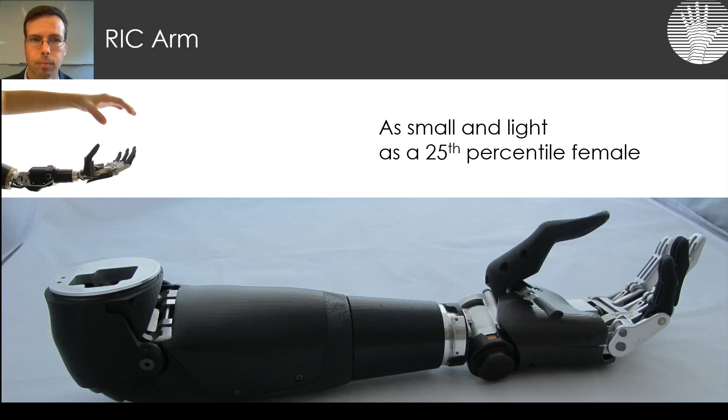Really, I think there were three lessons that we learned throughout this process. The first was that all prosthesis motion is dynamic acceleration bursts. It's not a constant speed. You're stopped, you make a movement, you're stopped again. That means there's dynamics involved. And so we found that conventional motor metrics were really not indicative of the performance of the motor designs that we needed, and I'll tell you a bit about that today.

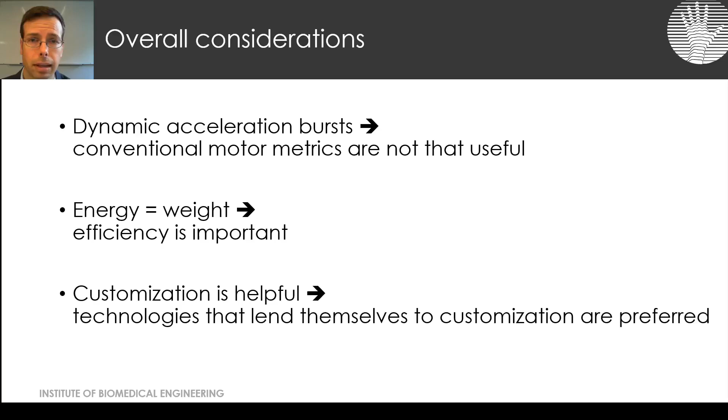We also found from our DARPA work that energy equals weight. So you can't just ignore the efficiency if the battery has to live within the weight confines of the prosthesis, and therefore efficiency of the mechanism is very important. And finally, we found that customization is really helpful. And so we found ourselves going towards technologies that were developed by other industries, but that were able to be customized so that we could tweak them for our specific applications. And I'll tell you about a couple of the technologies in particular that we customized for our prosthesis.

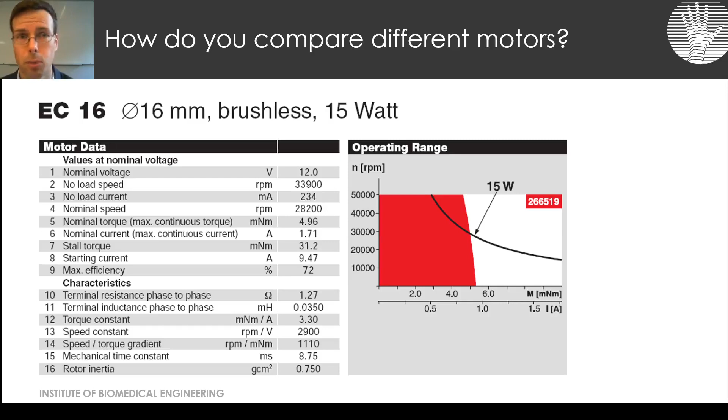Okay, so the first thing I want to talk to you about is motor metrics. So when you're trying to size a motor for your particular application, you can look at a motor manufacturer spec sheet and they give you a variety of parameters. And which one do you use when you're choosing a motor? Oh, that's a good motor. Oh, that motor's not so good. And specifically, if you're designing for robotics, how do you choose a motor?

One of the interesting things about robotics, which is a relatively niche field compared with all of the other motors that are used in the world, is that they typically have a limited range of motion, and they typically have high bursts of speed. And if you have a high burst of speed, that means you're going to have high acceleration. And high acceleration, given the inertia of the device, means that you're going to have high torques at high speeds. And the combination of high torque and high speed is that one spot you don't want to be in a motor design. And so it becomes the weakest link in the chain, so to speak, or the Achilles heel.

We can look at this by looking at the torque versus speed of a given motor. So a given motor can produce a maximum speed and a maximum torque. And relatively speaking, there's a linear trade-off between the two, which is limited by the resistance of the motor. How much current you can push through the windings limits the available voltage, and the voltage in turn determines the speed at which the motor can go at. So there's a linear relationship between the two, and we can accordingly think of a motor as having an envelope of speed-torque combinations that it can do.

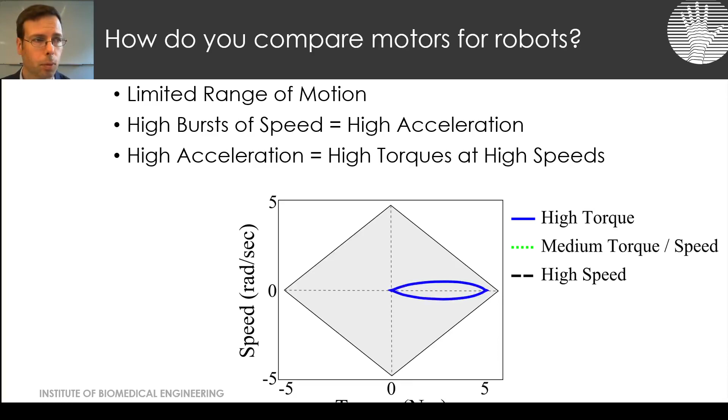We can then plot a profile of a given task with given dynamics, given inertia, given kinematics. So, for example, we can say, what if you're carrying a very heavy object, but you're moving relatively slowly from one position to another position? Well, in that case, your torque speed profile will look something like this blue curve. And you can see we're relatively close to the envelope of the motor, but we're okay.

We could say, well, what if I'm carrying less weight but moving a bit faster? We can see that's not going to be any issue for this particular motor. And finally, what if I'm moving really fast? You can see here that we're completely fine in terms of speed—we're well below our maximum speed.

But ironically, we're coming pretty close to that diagonal line of speed and torque. So it's the high speed task that may limit us, and it's not just because of the speed—it's because of the torque that's required due to the inertia and the acceleration.

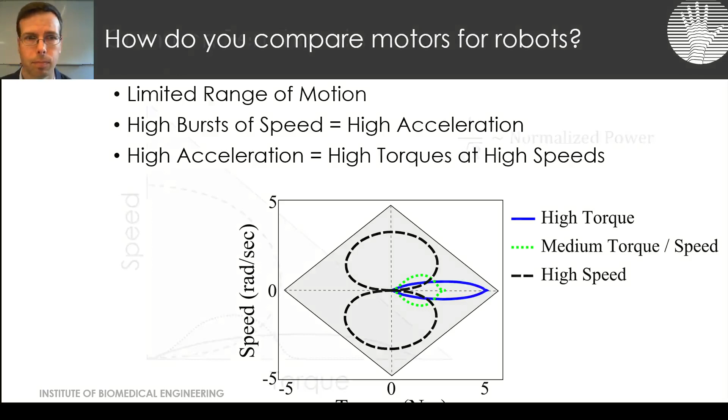Let's take a closer look at this plot, and let's talk about it in terms of some of the metrics available in commercial spec sheets. Many of you will be familiar with the stall torque or the torque constant of the motor, which map to the maximum torque the motor can produce, or the torque a motor can produce for a given amount of current.

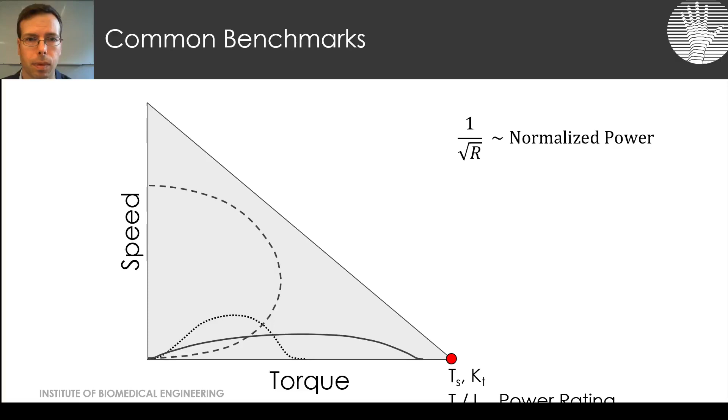We can also normalize that by the inertia of the motor and talk about the power rating. We can also look at the area—interestingly, the area of this envelope is equal to the maximum power. This is a rating commonly used by non-roboticist motor designers who want to know the power rating of this motor. It corresponds to the area, but we don't necessarily care about the area—it really depends on the profiles of the tasks we envision for these robots.

Now, a similar idea to the area is what's called the normalized power, and this is just 1 divided by the square root of the resistance.

So there's a motor constant. A motor constant is independent of the windings of the motor—motors can be wound with different windings. We see that the motor constant kind of blends together the stall torque with the normalized power concept. There's the maximum acceleration, and it turns out that this is equal to the motor constant normalized by the inertia of the motor.

And then finally, the one that we have found to be most useful is called the speed ratio. This is equal to something similar to the maximum acceleration, but the motor constant is squared. I'll talk to you a little bit more about that.

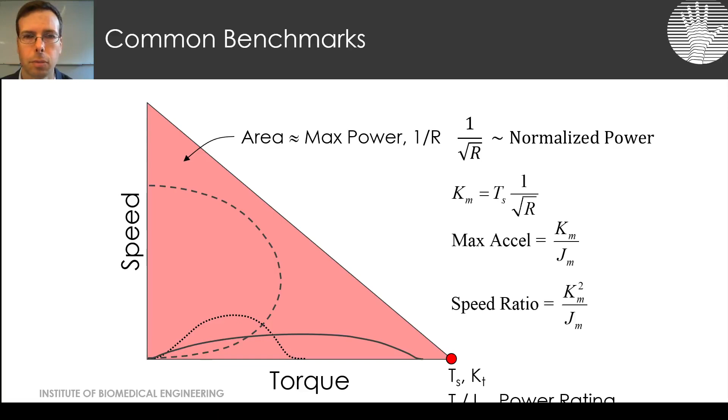So what we found is that if you set your motor envelope given a particular motor, and if you set your task given the profile you wish to achieve, you can mathematically separate the motor parameters from the task parameters. We did this in a paper we published in IROS, so you can check out the paper for the derivation of that.

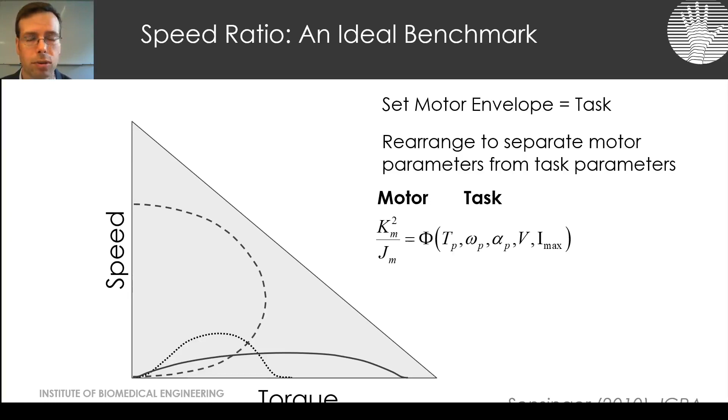So essentially you're saying, okay, I can get this speed constant from the tech sheet, and then I can calculate the value using this equation, which is available in our paper, as a function of what's the torque, what's the speed, what's the acceleration, what's the voltage, and what's the current.

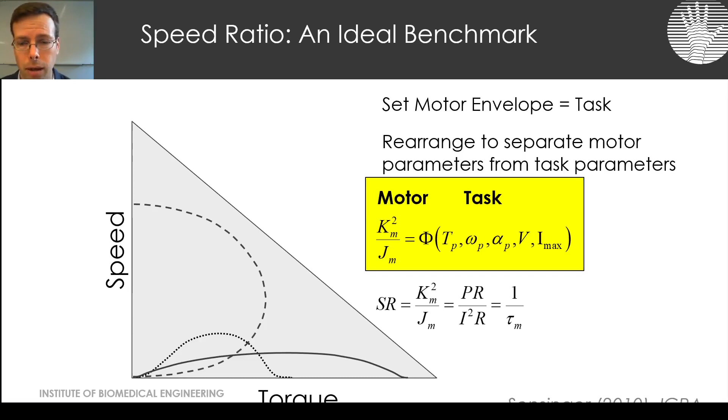Now, most tech sheets actually don't report the speed ratio, but they do report the mechanical time constant, 1 over tau m. This information is readily available on almost every tech sheet, so you can use it to predict whether a given motor is a good or bad motor for your specific design, regardless of the task. So we have a couple of assumptions here.

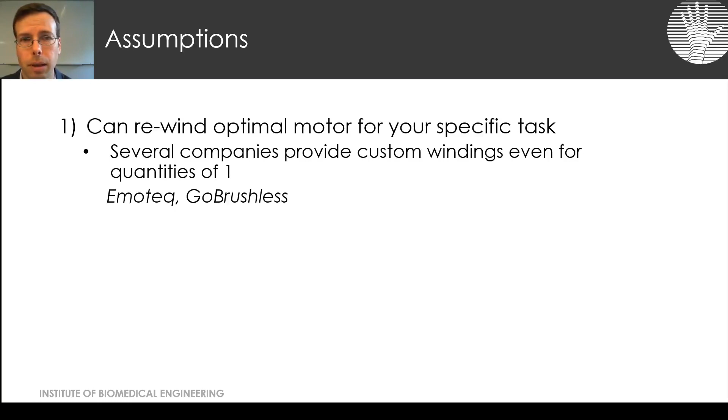One is that you can wind a given motor for your task. So when we're designing motors, we're looking at the general architecture rather than the specific winding—we're assuming that we can wind it. There are several companies that will do custom windings for you; two that we've used are Emoteq and GoBrushless.

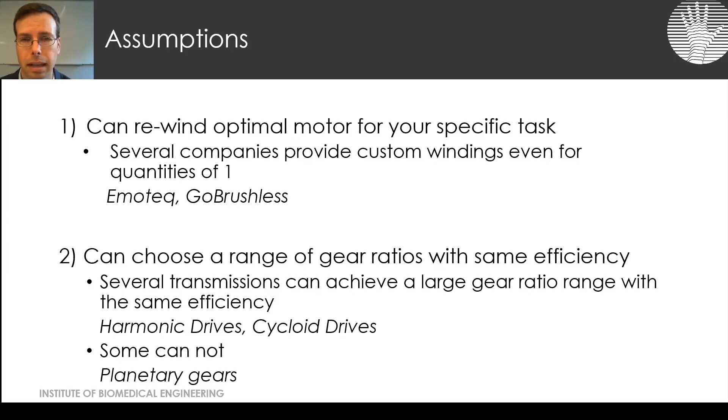We also assume that you can choose a range of gear ratios, and I'll talk to you about that in just a minute. We've used harmonic drives and cycloid drives in the past. Some gear transmissions cannot achieve a large range of gear ratios while maintaining a constant efficiency—planetary gears are a good example of that.

Okay, so I just want to leave you on this point with a simulation study that we did where we looked at a range of tasks. We looked at the motor envelopes and asked, was the particular motor able to achieve the tasks that we wanted?

And then we compared a variety of metrics. You can see that the rated power doesn't do that well. It can only predict about 60% of the success rate for real-world applications where motors do dynamic, ballistic tasks. And you can see that the speed ratio, while still not perfect, does a much better job of predicting whether a given motor is going to be suitable for a particular set of tasks.

Really, at the end of the day, you have to look at the motor envelope in order to see if a given motor design is going to work for you. But as a quick approximation, just sorting through all of the motors available, speed ratio does seem like the metric that's best for getting a quick guess on the power.

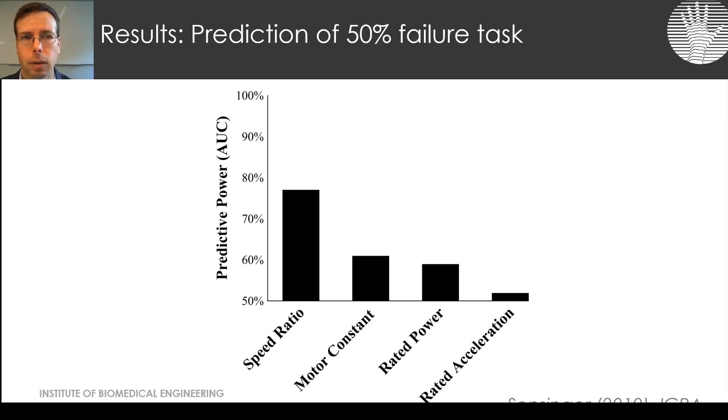Okay, let's transition to talking about, now that you know a general architecture for your motor, how can you tune, what should you be looking for in designing the motor?

So at least for prosthesis design, and I think for most robotics design, stronger is better. If we have a given output torque, a higher motor torque means that we can use a smaller gear ratio. And smaller gear ratios are really beneficial for most applications in robotics. If you have a smaller gear ratio, that means your gear is spinning slower, and that means it's quieter. So if you care about sound, you want a high torque motor.

Also, typically, a smaller gear ratio will be more efficient. So as long as you can maintain the efficiency of your motor design, you'll get an added benefit of efficiency in your motor. Typically, smaller gear ratios can be smaller, and they also take less weight. And at least for prosthesis design, transmissions are about 2 to 3 times the motor mass, so they're a significant part of this weight equation that we're always trying to minimize.

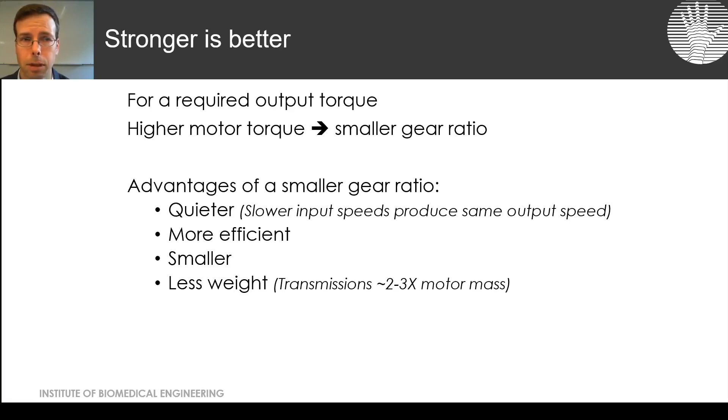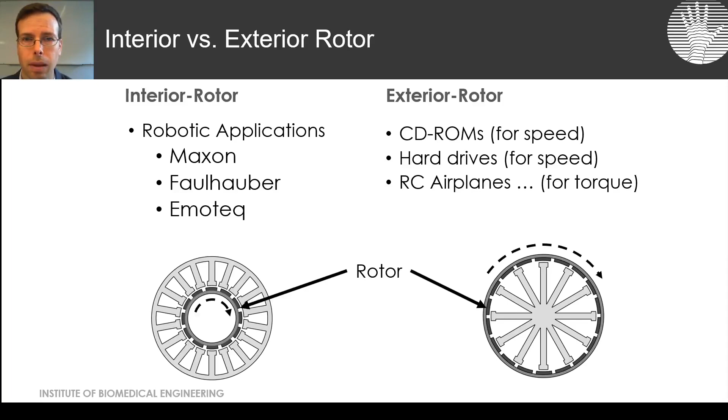We found that exterior rotor motors are really good for delivering high torque applications. Interior rotor motors are much more well known in robotic applications. Maxon, Faulhaber, and Emoteq have all conventionally done it, although Maxon's recently switched over to exterior rotor motors as well. Exterior rotor motors, ironically, are better known for CD-ROM drives and hard drives because they can spin at incredibly high speeds without the magnets ripping off due to centrifugal force. But recently they've been used for RC airplane and drone design, and they can develop pretty high torques in those applications.

So we've done a variety of studies. We've done simulation studies, we've done experimental studies, and we've consistently found that exterior rotor motors have more stall torque, better efficiency, and use less power than similarly sized interior rotor motors.

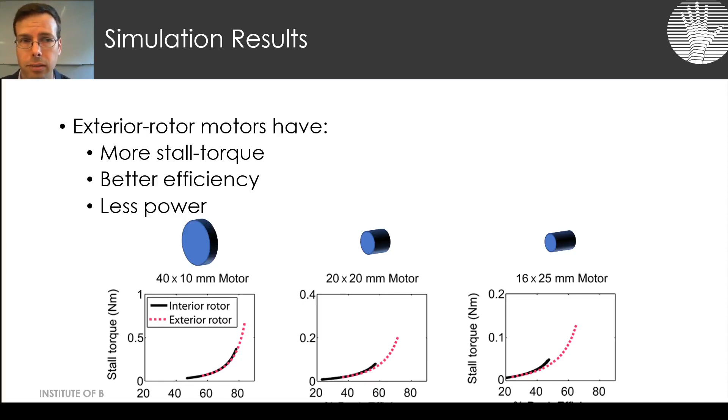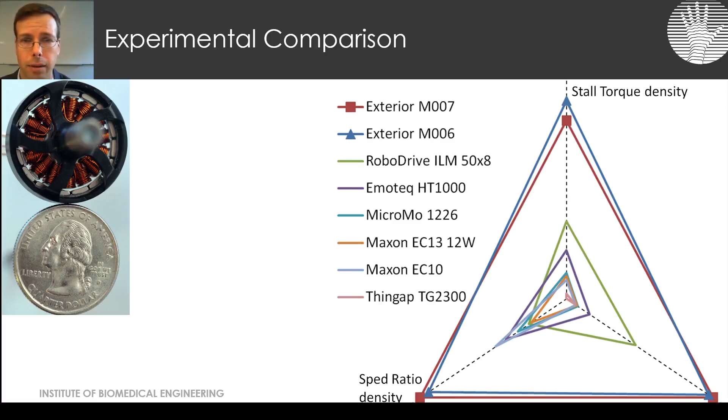We've done a variety of empirical studies. This is an example of a motor that we had custom wound for us. It's about the size of a United States quarter. And you can see whether you're looking at speed ratio density, which we think is the best, or motor constant density, or even stall torque density, the exterior rotor motors are consistently substantially better per weight than interior rotor motors, regardless of the company that's making them.

There are some concerns when I go to conferences, and when we have the discussion today, some of you may want to talk to me about some of these concerns. There are some common concerns that I get asked about switching over to exterior rotor motors.

How do you do heat sinking, for example? We found that we can heat sink from the back. Some people are concerned that the rotor itself is only supported on one side, but the existing hobbyist designs have really solved this problem. They've got a double bearing design, and that does a good job. You do have more inertia because the spinning part has a larger diameter, the exterior part. But we can get away with a plastic rotor shell using some tricks of the trade to keep the magnet flux working with very thin flux rings. And so we're really able to reduce the inertia of the rotor.

Some people say, well, historically they're used for high speeds, but that's only because of centrifugal force. And a lot of people say, well, they're not commercially available, but they're becoming more common. Maxon is now producing exterior rotor motors. And many hobbyist companies are willing to wind drone motors for you, although they'll often caution you that they don't think they're going to fly, which is fine. We're not using them to fly. Two companies in particular are Go Brushless and Castle Creations. There are many more that are available as well.

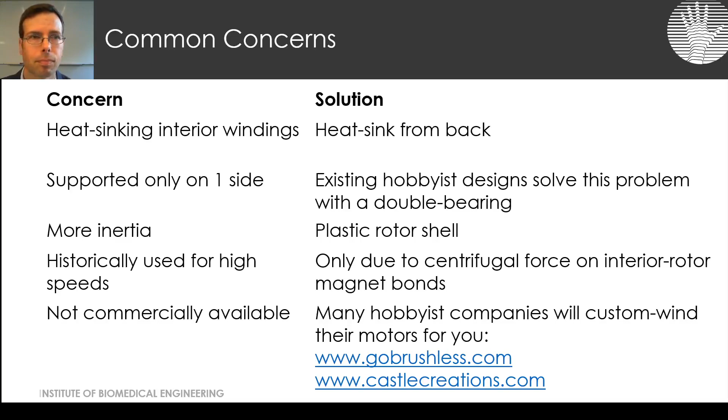So finally, let's transition to transmission design. As I mentioned earlier, at least for prostheses, transmissions typically weigh at least twice as much as the motor. And transmissions are typically inefficient at the high ratios that we need, which then means we need heavier batteries. So transmission design is really, really important for prostheses, and in my experience, for a wide variety of robots.

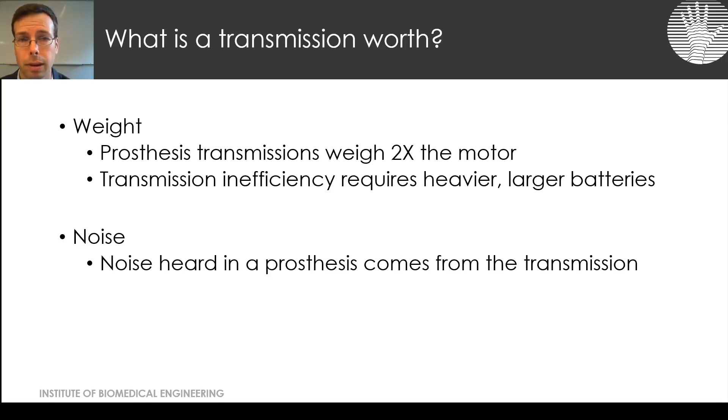As I mentioned, we've done systematic noise studies in anechoic chambers, and most of the noise we hear from a robot is coming from the transmission itself. Transmissions see the highest stress and the highest impacts in most loads, unless you're using a series elastic actuator type application. So durability is a strong concern for transmissions.

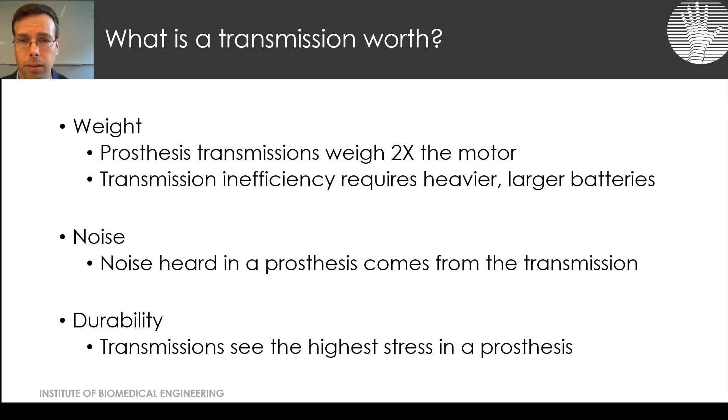In the past, we've used harmonic drives. Harmonic drives are an excellent transmission. You can get very large transmission ratios. They typically have about 70% efficiency regardless of the ratio, so for small ratios that's not that impressive, but for large ratios that's actually quite an impressive efficiency. They're very strong, very compact, and are used by a variety of robotic companies, including RoboDrive, Waseda, MIA, and Liberating Tech Prostheses.

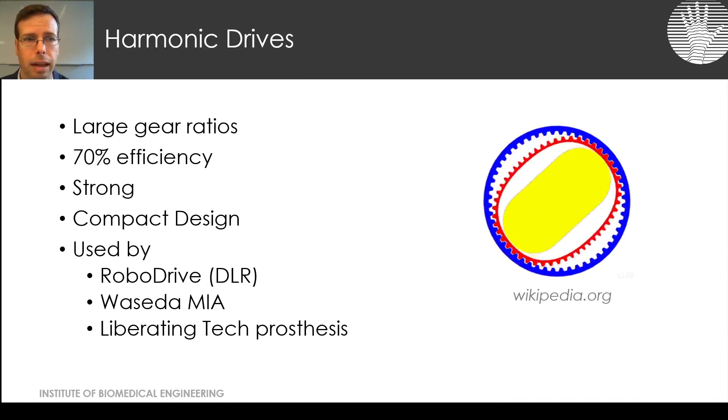But today I want to talk to you about cycloidal drives. Cycloidal drives are very similar to harmonic drives in topology. Harmonic drives have an elliptical input, and cycloid drives have something essentially similar, only it's an offset cam. They both have 3 parts instead of 2 in terms of topology, but there are some differences between the two.

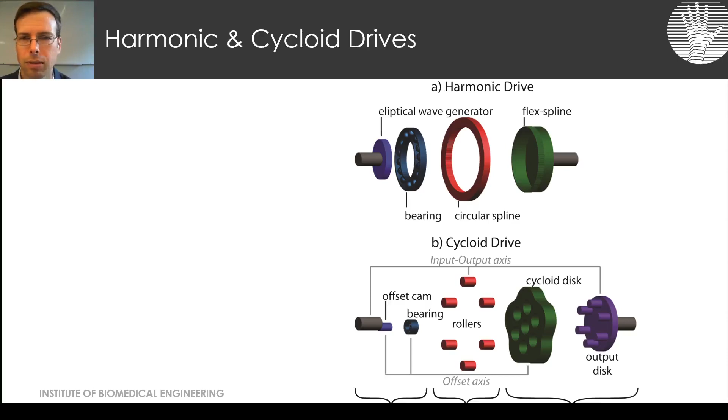The high inertia part for a harmonic drive is the input, meaning it's spinning at high speeds. For cycloidal drives, the high inertia part is the output, meaning it's spinning at low speeds. So in terms of reflected inertia, you're better off with a cycloid drive. But in terms of backlash, harmonic drives don't have any, which makes them very popular for a variety of robotic applications. Cycloid drives have some backlash that can be designed around, but similar to a planetary drive, you're always going to have a little bit.

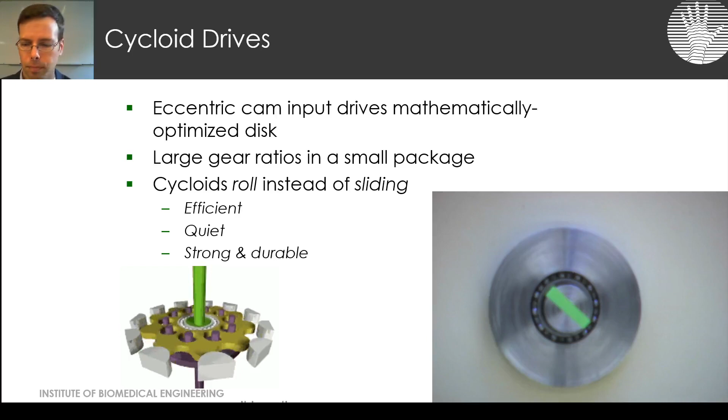There are some limitations to cycloid drives. The resolution, if you're going for very small sizes, is typically limited by the technology you use to manufacture it. We've used wire EDM to manufacture it. There are some concerns with the finishing of wire EDM, but we haven't had any issues with that. We found that as long as you wear them in over a couple hours, the efficiency is really good.

The bearing force ends up being one of the key limitations for cycloid drives. There's a very large force on the bearings, related to the gear ratio, the amount of eccentricity, as well as the output torque. So we've spent a lot of time looking for needle bearings and other bearings that can withstand those high forces. That's probably the key limitation of cycloid drives.

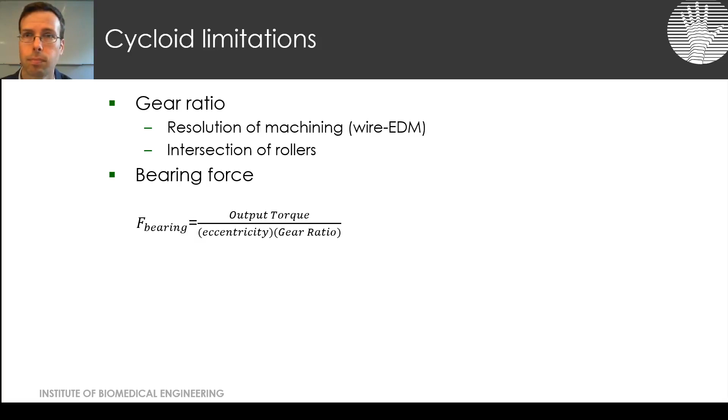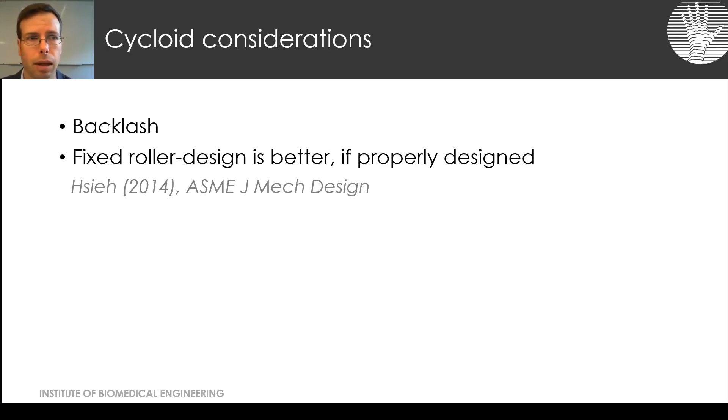As I mentioned, backlash is an issue with cycloid drives, but for applications like exoskeleton and prosthesis design, it's relatively small. We found that fixed roller designs are actually better than free spinning roller designs, which is particularly helpful for small applications like a lot of roboticists need. There's a good paper that talks about needing a very specific curvature if you're using a fixed roller design, and we're using the one referenced in that paper. Works very well for us.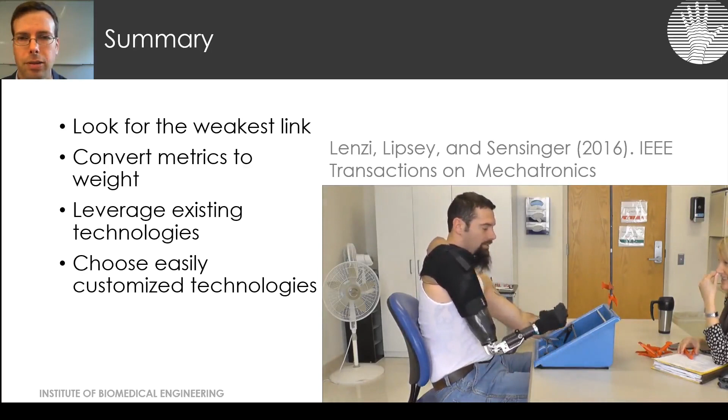In summary, we've had a lot of luck creating small prostheses. The video I'm showing here, ironically, is on a very large male subject, but the prosthesis itself is a 25th percentile female prosthesis. It works very well. We've had to look over and over to find the weakest link and then tackle it, and we've really tried hard to leverage existing technologies rather than invent new ones, making sure those technologies were customizable so we could dial them in, run through all the simulation exercises, find rooms for improvement, and then improve them through frequent rounds of iteration.

So I look forward to talking with you in the open panel discussion.

This project, as I mentioned, was done at the Rehabilitation Institute of Chicago about 10 to 6 years ago, so a lot of development has happened since then. There's a fantastic lineup of speakers at today's workshop, and I'm really looking forward to learning from them and seeing what the newest developments are, and talking with them and you about possible explorations in the future. Thank you for listening, and I'm looking forward to seeing you in the open panel discussion.